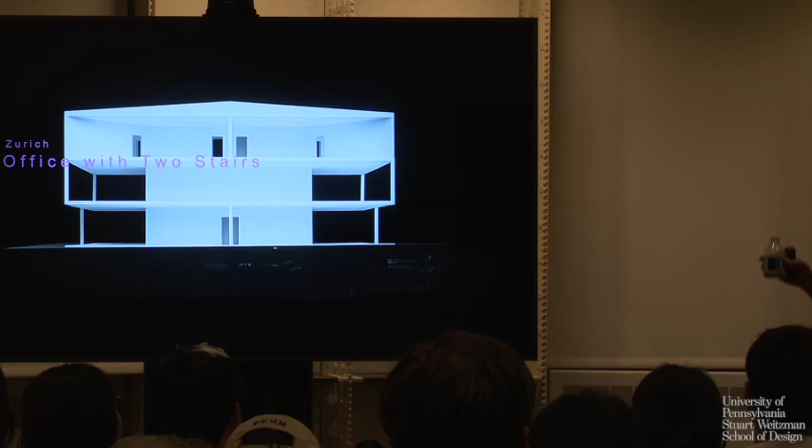So this led to projects like this, and this is a student work that I made in my last semester. We were asked to design an architecture office for ourselves and how we would imagine our lives. So that's already the final project, and I will explain it.

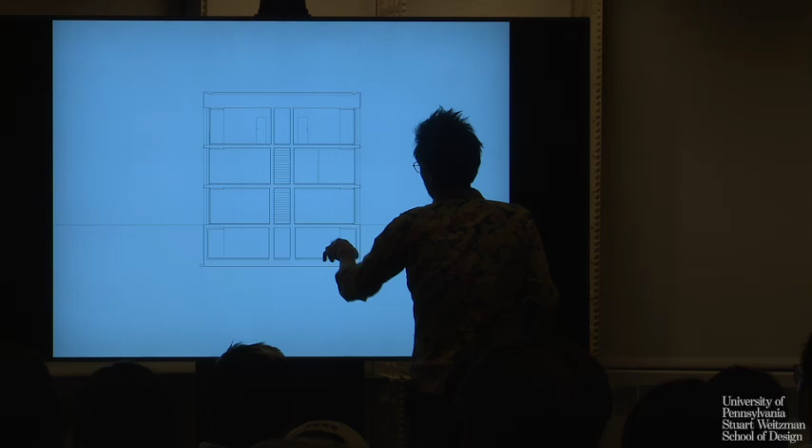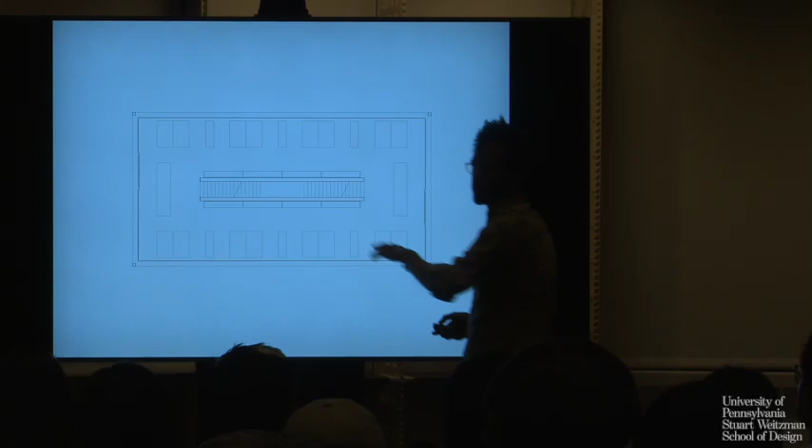It's in a garden somewhere in Zurich. It's a 3-story building above ground and one below ground, with a core in the center with some stairs. Now imagine you will be my people working in my office. You would come through this path, say hello to the secretary, walk around, and take up these stairs. You come in here, you walk up to the first floor, and you find your place, your table, in the first floor.

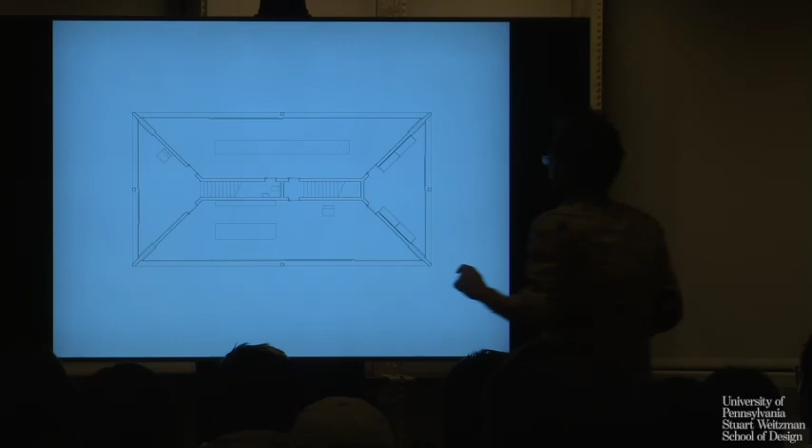Now, if I would come, I would also walk in, say hello, but I would take these stairs. And my stairs are blind to the floor where the workers are, so they don't see me and they don't see the condition I'm in. I just go through them to the top floor, and I'll arrive in this little foyer space, and enter into my small office all alone, with a little library and a little desk.

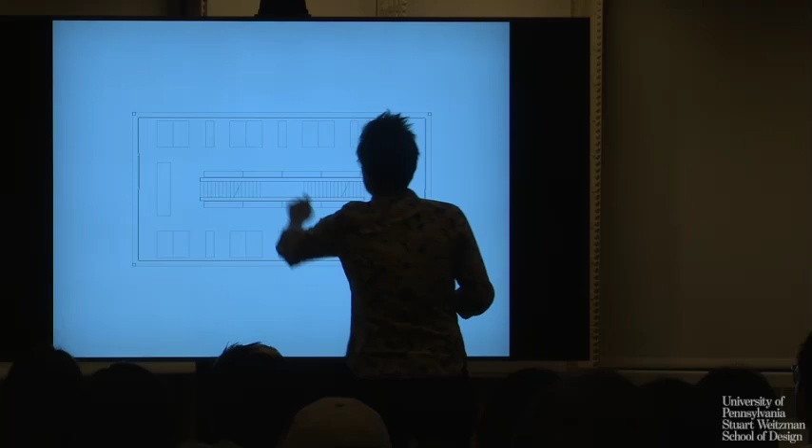And if you look at the structure of the building, it has a core holding the 2 stairs, and then it has 4 cantilevering walls. These walls hold a roof, and since the span is so long, it increases the structural height in the middle.

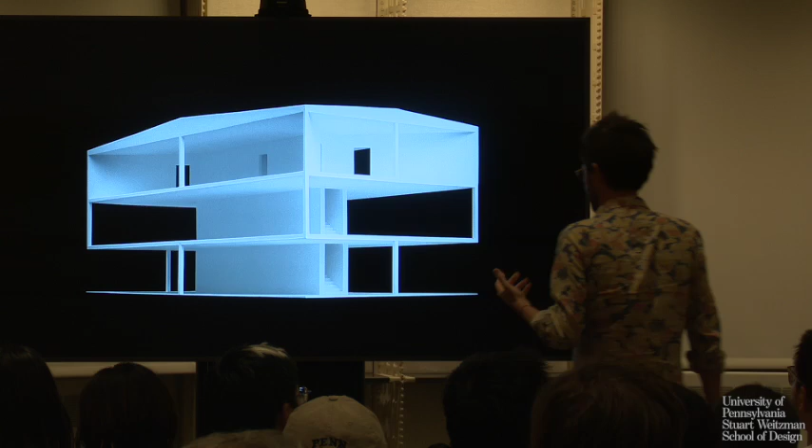And this plate is hung on the cantilevering walls, so it would have a tendency to bend through. In order to not bend through, it's pulled up. So this is actually not a pillar on compression, but on traction. And the same is with this plate — twice it's held on a traction cable, and only in the middle is it actually a pillar on compression. But so that you cannot see this, or feel it, or understand the system, this traction cable is formulated as a pillar on compression, a 20 by 20 centimeter pillar. So it's a first trial to mislead your reading of the building.

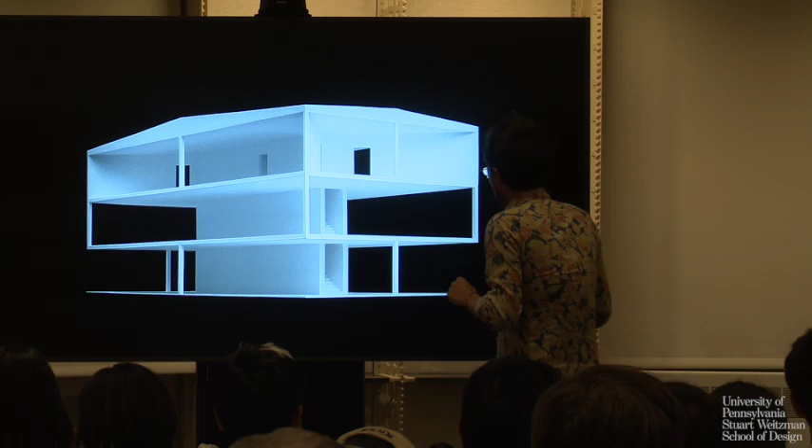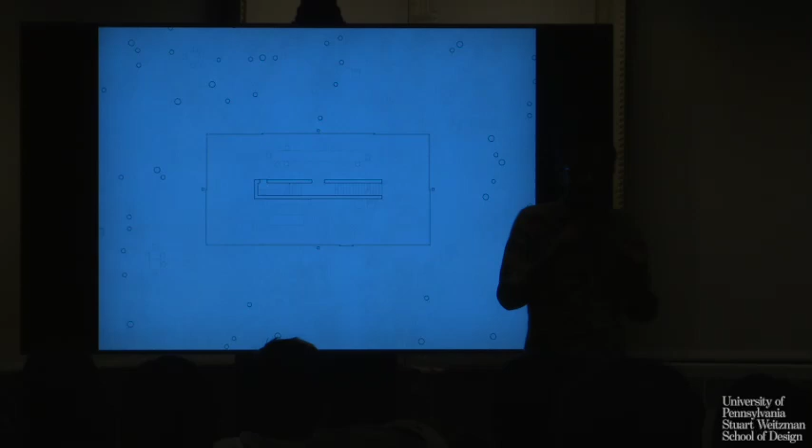The next thing is, spatially, I think we have an overlapping of the three principal building spaces in architecture. The first is when the pillars are in the middle, like the Noguchi lamp or the 50 by 50 building by Mies. The pillars are in the middle and not in the corners, and as a consequence the inner space is not defined, and the space can just flow through. While in the working space where I want people to work, they are contained.

And on the top floor, there is this space that has a strong back and a direction to one side, an opening.

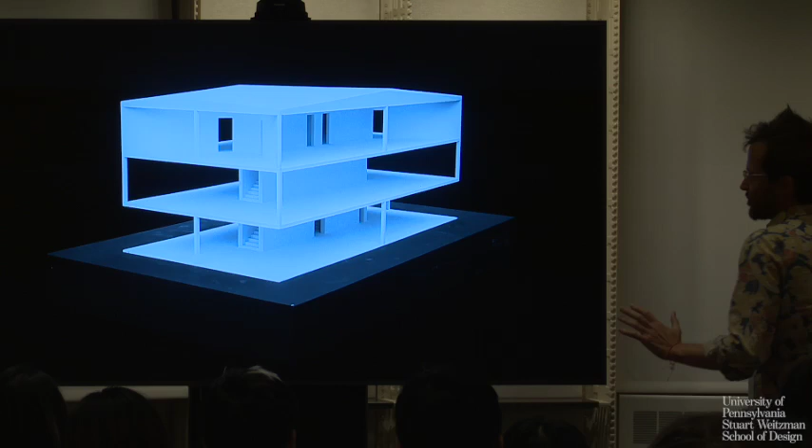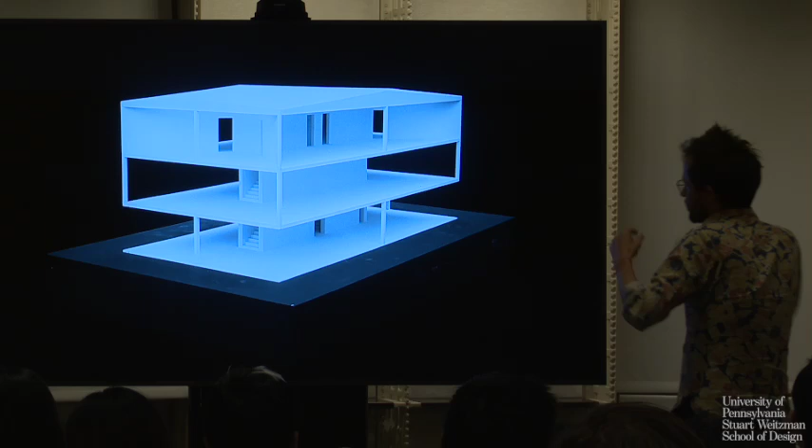So when it comes to the reading of this building, I think it's interesting because it overlaps several connotations or readings. One could read it as a kind of Greek temple because of the tripartition, because of the roof, which is actually structural. But it could also look like a Maison Domino with the plates and the pillars. But when you read it longer, you realize it cannot be, because the pillars don't go through. So I would argue that this...

building has a lot of memory, but none of the memory brings you to a conclusion. You're always lost. So it's constantly trying to make people interested to look at it, but at the same time, you don't get to an end.

Good, and the next project I would like to show you is the house in Balsthal. This is a little house in a valley in Switzerland, in the mountains. This place is a very beautiful place, but also a very boring place. So I imagined the house should be so good that you could stay two weeks in it without exiting.

Then I built it. And the proposal for what this building does is kind of a machine to perceive the exterior in three different ways. These three different ways are simply stapled on top of each other.

So the first space is when you enter here. This is a space that is completely glazed, very low, and I would say no back wall as a consequence, because it's all glazed. You never have a back wall. I would say this is just kind of a hole in the entire territory.

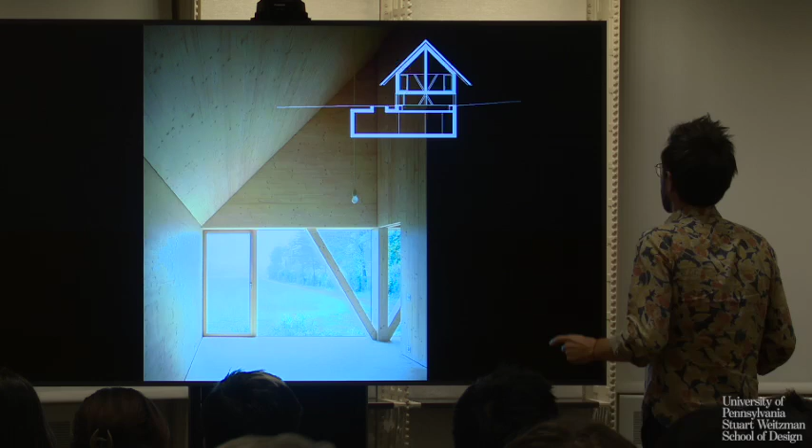This is the exit into the garden, and this is the kitchen. Now we're upstairs - the oppositional space, the high space. It's in the simplest way divided by four plus a staircase. It's the simplest way to produce an entry into these four rooms.

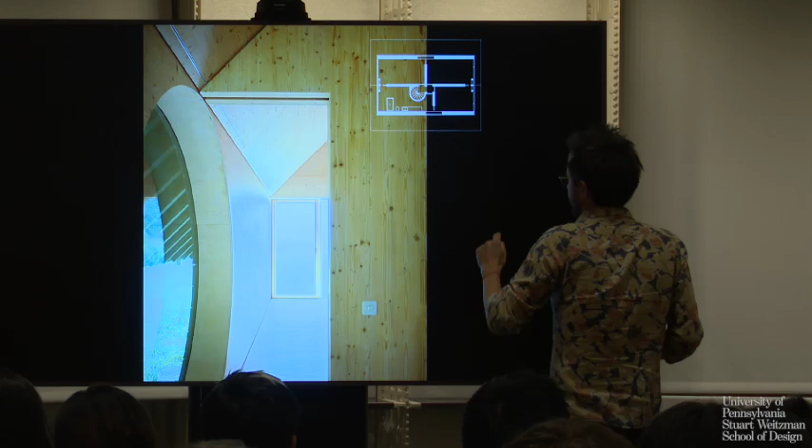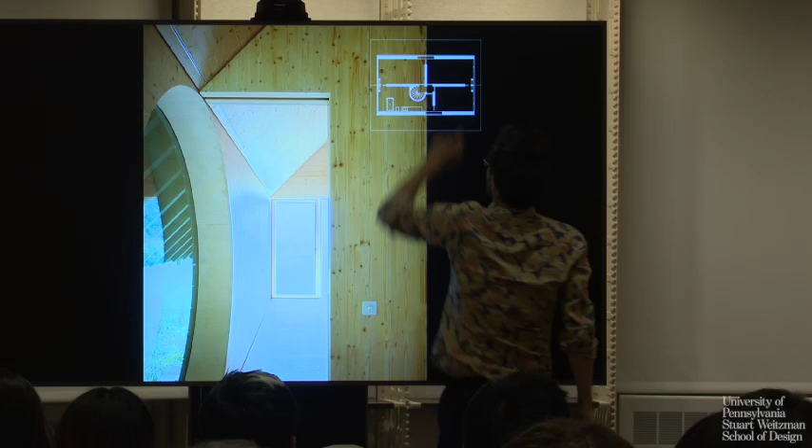And what I mean by this round window - that's quite important in this project. It started because when you imagine a building with a gable like this, it's very easy to open this side with glazing, but it's very difficult to open here, especially because in reality there are two pillars below, so it's really the worst place to punctuate it.

But in order to produce a balance between this direction and this direction, I proposed this huge circle that has such an emotional power that it's able to balance or compete with these two sides, so they become kind of equal.

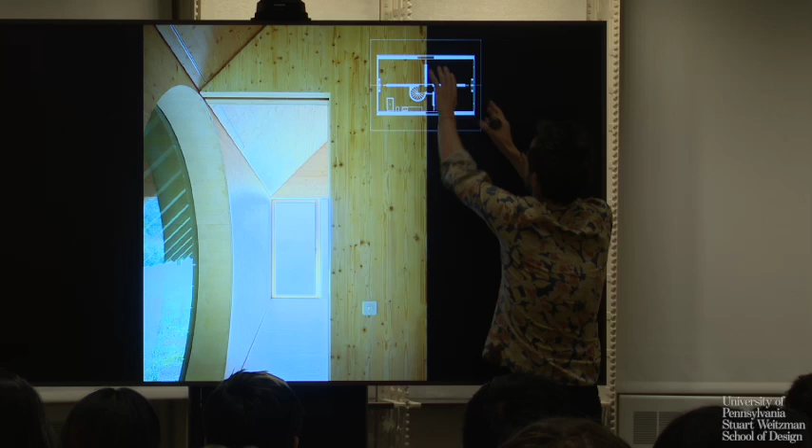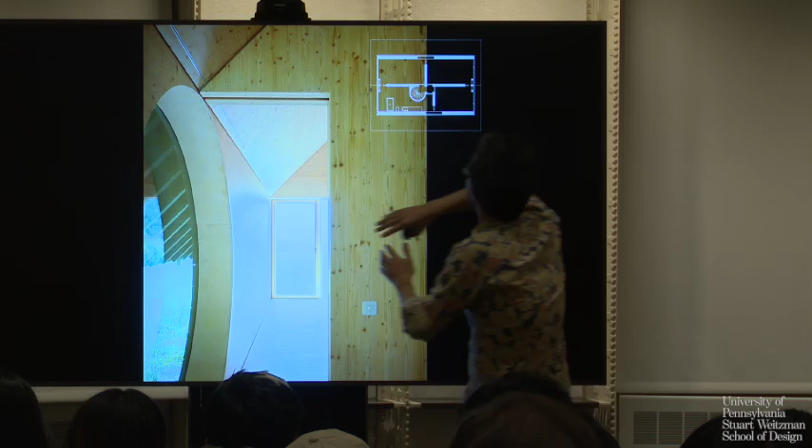What I realized after construction is that it's a very nice place to be here, and I think it's because you have 4 scales at the same time. One scale is the nails and the material stuff you see. The second is the scale of the person, because this circle is kind of the size of a person. The third scale is the huge inside space, and the fourth is the flat landscape, and this all happens at the same time.

So now we go from the top room to the basement, which is this one, and this space looks like this.

The next project we'd like to show is a house in Bonassola. It's in Italy, a very beautiful area at the lake, at the sea. When going through this land, I realized that mostly the old buildings are very beautiful and the new ones are very ugly. And I kind of asked myself why.

In a very simple way, I would say these new ones just don't get the patina in a nice way. The plaster is out of plastic. They just don't manage to get nicely old.

So I thought, let's do a building that from the beginning looks extremely old, like a ruin already, like it was already over. So I started with a section, before knowing the space, because the idea was how can I get all the little details away so that I don't see things that indicate time, like electric plugs or the frames of a window.

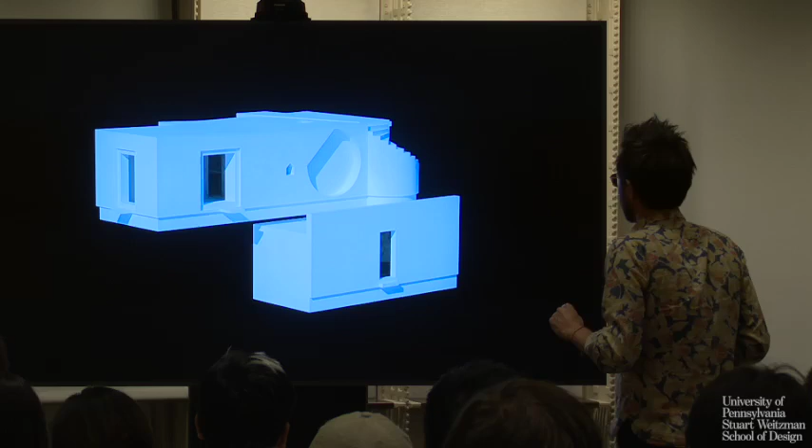It's a very beautiful view, and this is actually how this building looks. You arrive from this upper part, see down into the sea, go down into these steps, and enter from the steps into a little garden. And from this garden, you come into a main space and some additional rooms.

This main space is divided into two rooms. One room is a winter and summer room, which has no windows, and the other one is the in-between room, so spring and autumn. In the autumn room, we have a Zentralraum, like a central space with 4 openings, while the winter and summer space has no windows, but a little zenithal window.

I always like this idea to be in one space, for example here, and at the same time you're also in its opposite, and you kind of see both, but are in one. I like this double existing of things.

From here, this may be interesting. I needed some place to sleep. But the building would have been best without any room to sleep, because now it's completed, it's kind of a perfect rectangle. And I tried to find a strategy to add a room without you seeing it somehow.

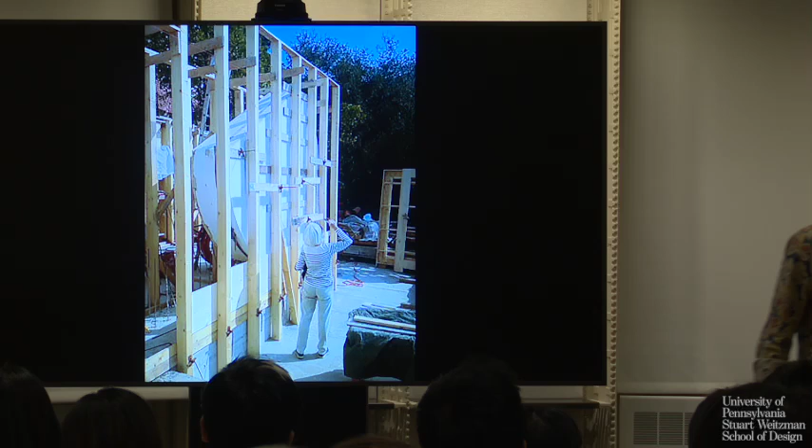I wanted to imagine, this is another aspect, it's on a slope. And as you can never see this building as an object, you never have a distance to see the full building. The building is always like 1 meter in front of you, because this is now a construction site, but here it will immediately go down. So you're always along this wall when you walk around it. And what I wanted is that this wall becomes very, almost like Baroque, but in a contemporary way.

So I tried to do the ugliest construction I can. We took this Roman way of pouring concrete, of making this slab. So there is no metallic binder to make it tight, and all these boards are not tight, so the concrete milk will always exit and it will be full of holes. And like that, I hoped that when I'm close to this building, it's full of man-made traces.

And you also see in construction, it indeed leaks out everywhere, and it also has this physical proximity of concrete and trees. Here are some first already pictures of how it now looks.

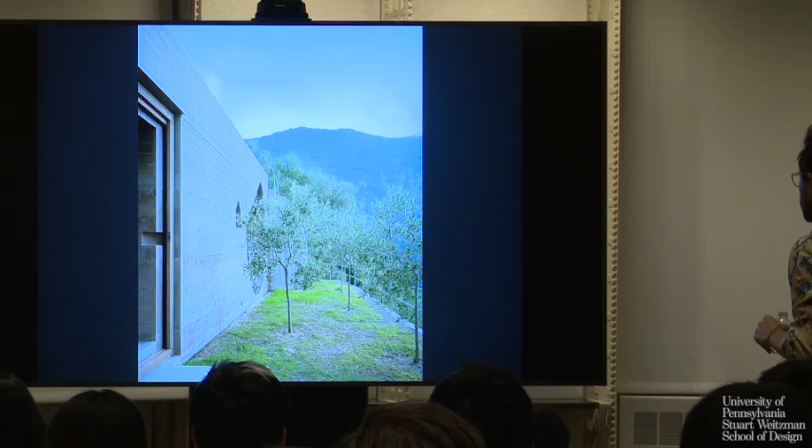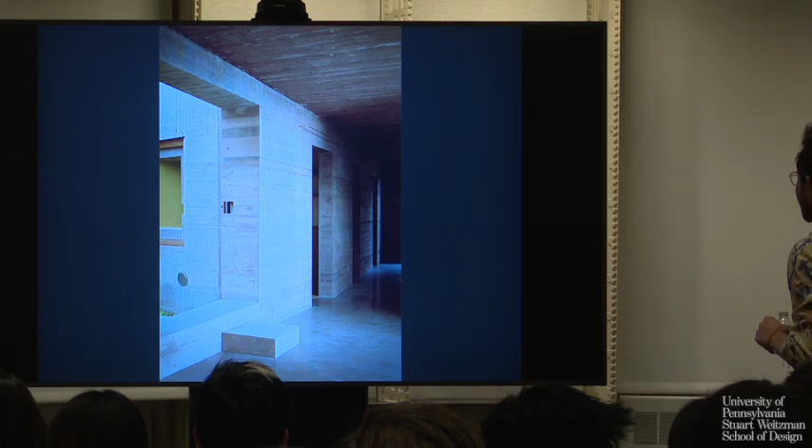Sorry, doesn't end. Yeah, don't talk about this. Okay.

No, I mean, maybe I do. When you are there, it's interesting. You have proximity, close stuff, walls and bricks, but you also have this universe and this huge sky and this huge sea. So you have these two complete different scales, the proximity and the wideness. And I always thought it needs something that responds to this wideness.

And the proposal now is that somehow this circle with this cut can, in an esoteric way, almost start to communicate with the sky and with the wideness. So it's this antenna or this simple thing that can connect with the sky or with the sea.

Good. And next project is House in Harris, House on an Island. This project is based basically on the condition of this area, and the condition is it has no trees, it only has water and rocks. So I tried to do a building that is able to confront the idea of water and the idea of rock.

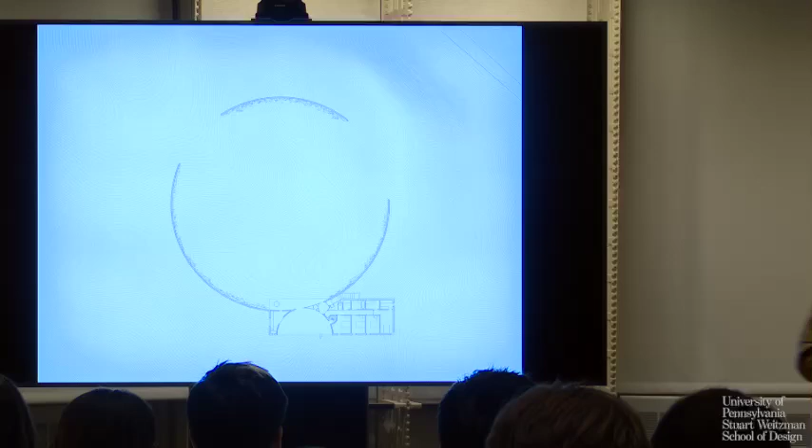And that's the conclusion, that's how the floor plan looks. We have here the space that should be able to confront the sea, and here, as a fragment of this whole, it's the space that activates the rocks.

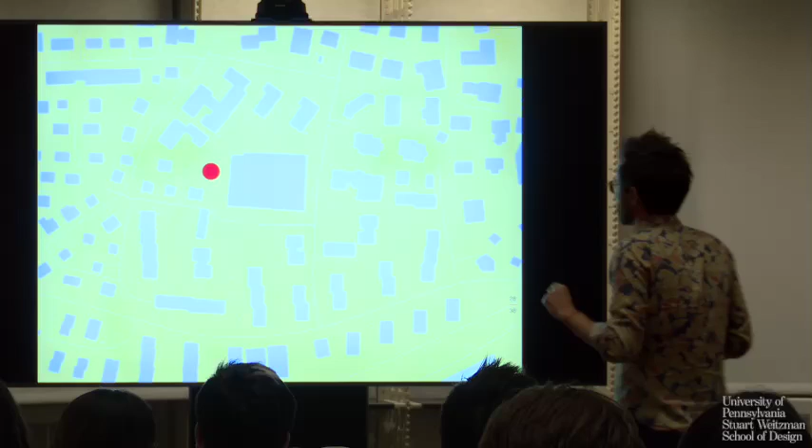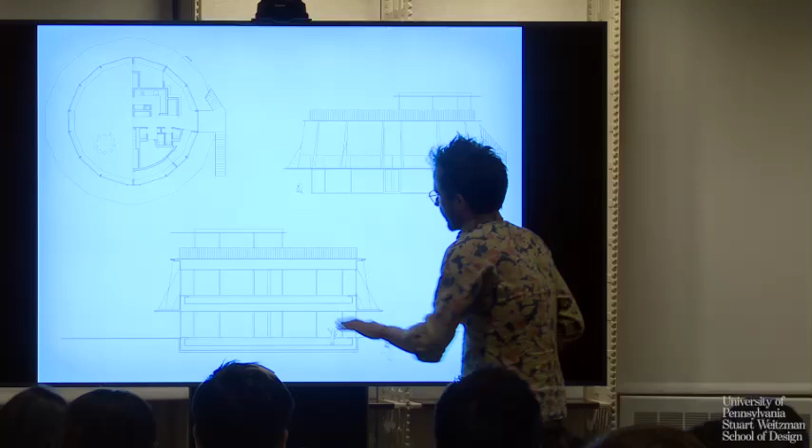And I'll not talk so much about this, that's how it looks. These are these school rooms.

Good. And then lately, or already some years ago, I thought that this picture of the donkey was kind of over. You know, it doesn't represent anymore my time. So I was asked, or I thought for a next publication, I make a new picture.

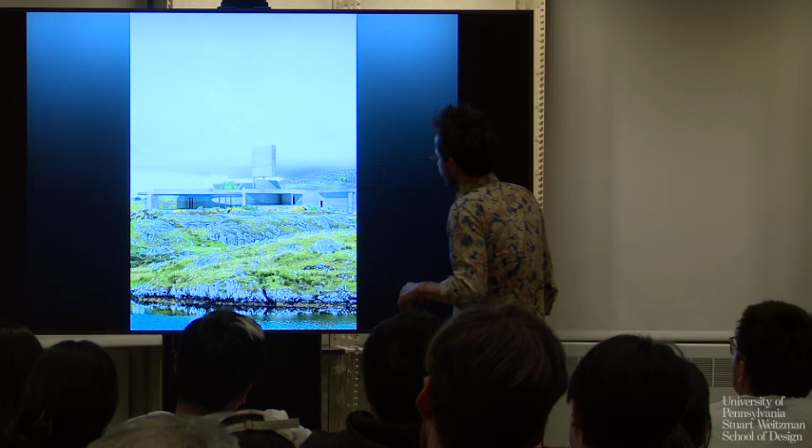Same landscape, but this time a very different project. There are no more clear rules, and architecture just becomes a kind of procedure to walk from different spaces to different spaces. Also in the model, there is no more gross or general idea — also in section, and also in the perception.

It's a building, the whole thing — one rectangular space, with one wall that divides it into 3 places: eating, bedroom, and bathroom. And in section, it goes slightly up to the forest, and it has this roof towards the street.

So actually no more real rules for things. Similar for this house for a doctor in Switzerland, at the Lake Gruyère. He has a family with 4 kids, and he's a doctor who operates, and at night he goes home and fixes cars to relax.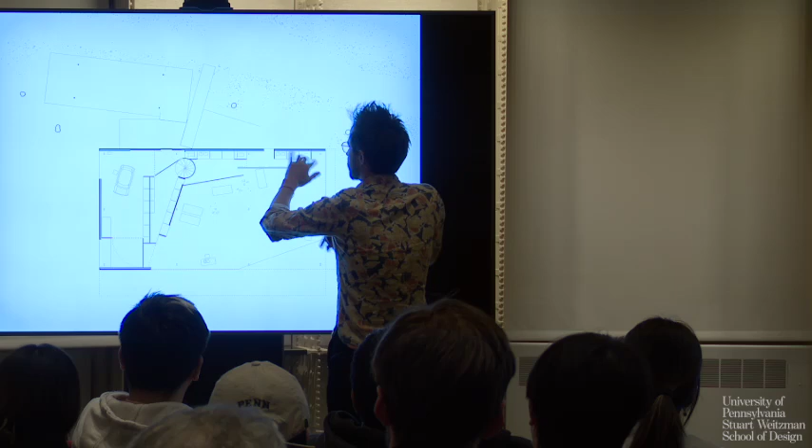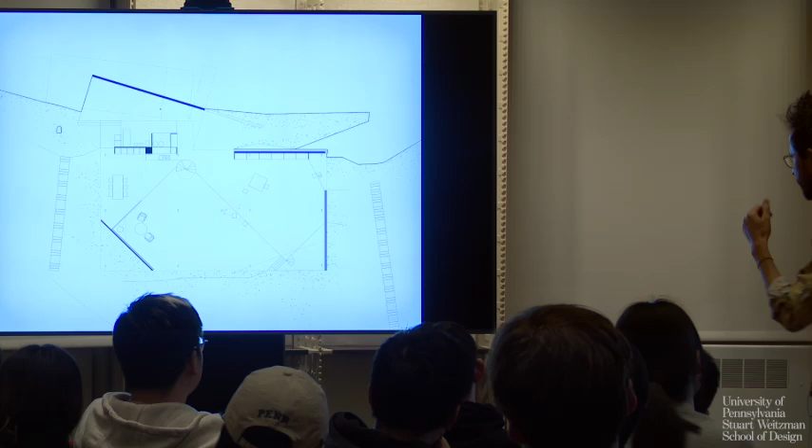That is the floor plan of his building. So you enter the building, and there is a wall where you can either go straight to his car repair place, or a wardrobe, or to where the 4 children somehow live in this unordered but huge space. There's some kind of toilet condition, stairs to go down, and then also down — it has no more clear structuring order, but only, I would say, a kind of temperature or a kind of taste of space.

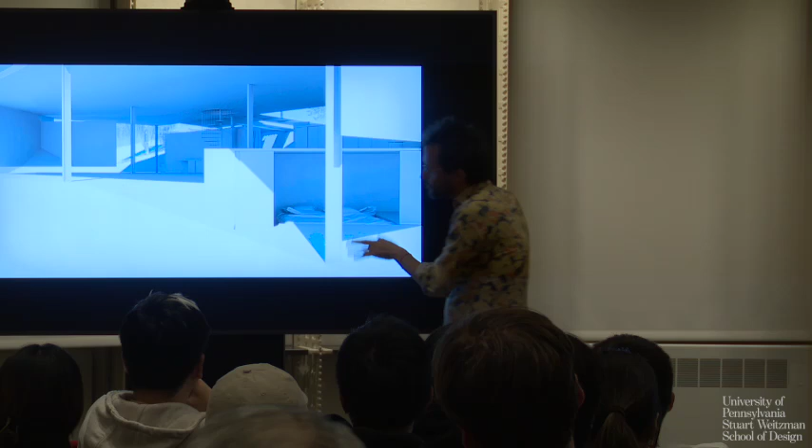That's how you enter the building. These are the kind of spaces in here. I always liked that there was a very small way to go to the bedroom that is kind of hidden from it all.

Now another topic that came in parallel — there was a kind of housing we always did a bit, and this was a study project for the national train company in Switzerland and for steel people. It was during COVID, about how you can combine living and working, and how you can apply this in housing.

I find it also very beautiful in these pictures that exist of Louise Bourgeois' apartment. You can always kind of double read them. It's somehow her living room, but it's also somehow an office or something. It's not really clear what it is, or this is her kitchen and workspace that somehow expands in a funny way, or that's her bed.

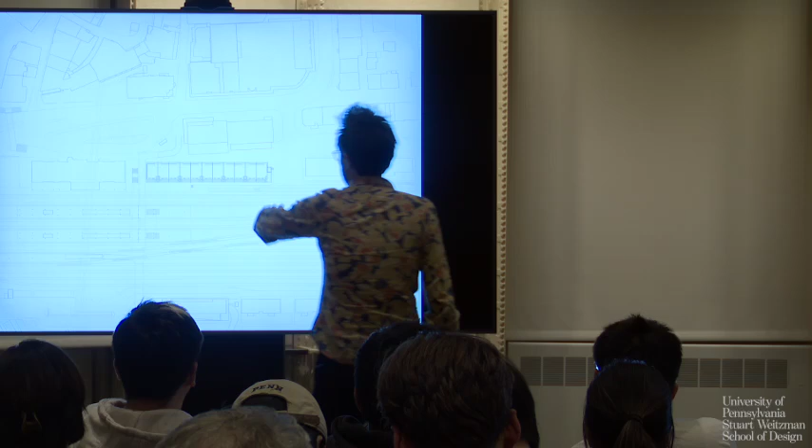So this is this housing based on this idea along the train track in Switzerland. And they base typologically on two ideas. There are spaces that are too small but extremely specific, like in a car, everything is very precise, and even though it's small, everything has its space. And then there are other spaces that are kind of too big, but they are programmatically undefined.

There's another principal idea that in Switzerland usually the bathrooms are in the cores and the sleeping rooms are at the facade. So I thought it would actually make more sense to invert this, because you go and sleep in a very protected place, like almost in a cave, so in the center, but you go and wash yourself at the nature where it's clean and the air goes through. So bathroom goes to periphery and sleeping goes to the central, to the core.

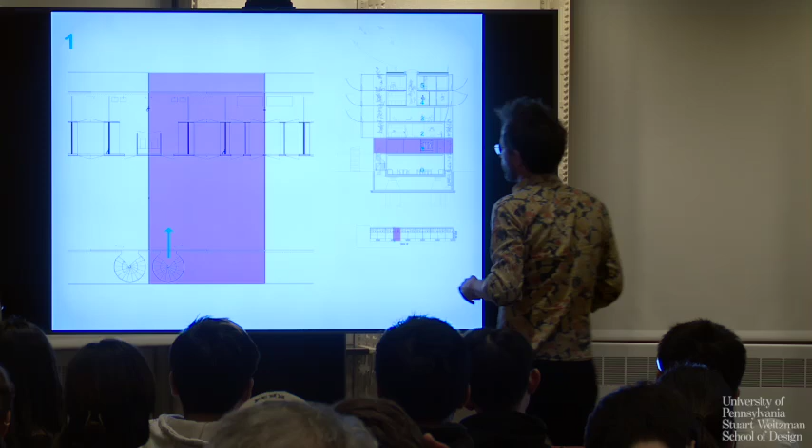This produces then some typologies. So this is kind of this undefined, too big ground floor space. And then you would go up and it would have 4 bedrooms here, very small, and the bathing area in the back. And you could open this bedroom walls, so it becomes part of the space and kids can kind of run around, or you just open the doors like this.

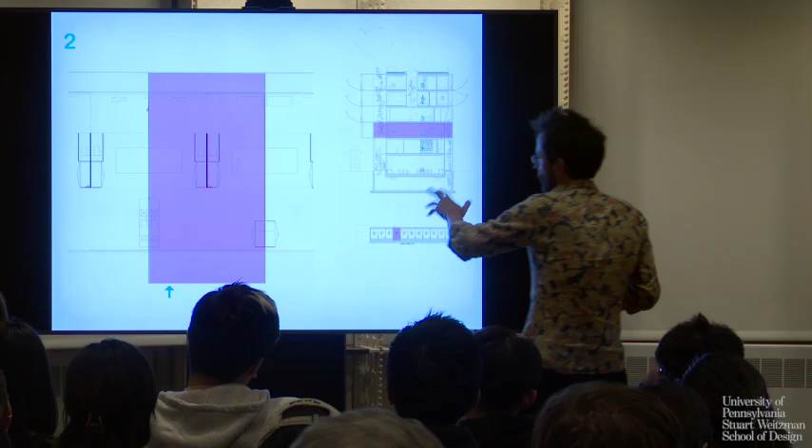I will not go into it, but there was also an elderly home, new typologies for an elderly home, and also some typologies for student apartments that are extremely cheap by simply making the bedroom very, very small, which I will also not enter, and then a structural system to have a community level on one floor.

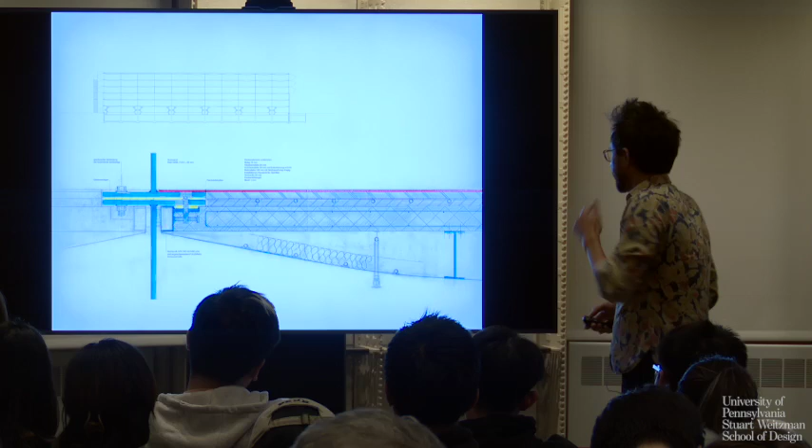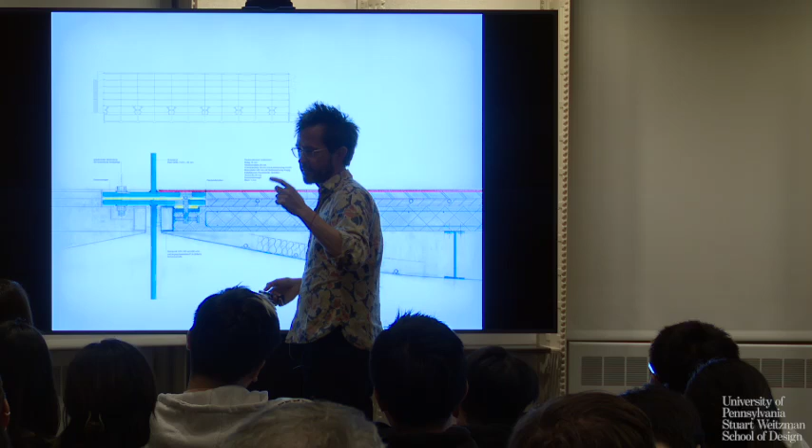And I wanted to make this look like paper. So it's built out of steel. This is a full steel wall. And by the way, this really works according to structure and phonetic and fire problems. I mean, it's really buildable. It's a steel of 2 centimeters. Actually, 1.4 would be enough, but we made it 2. And very thin slabs, which kind of don't work in metal because of fire reasons, but that was the slimmest that we managed.

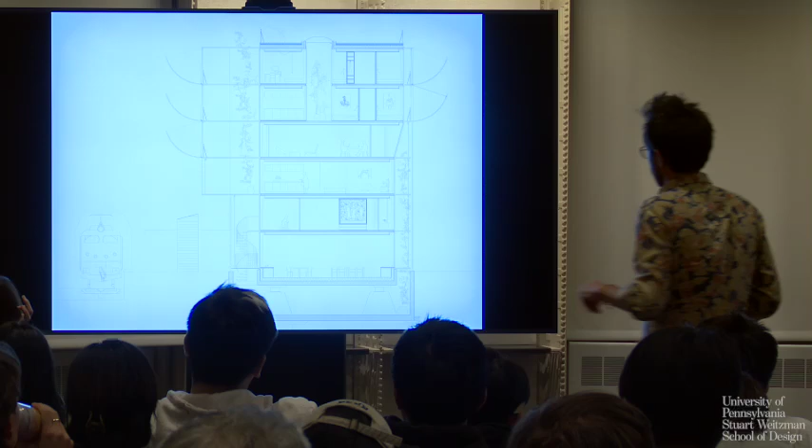And that's how it looks in section. And it's a section into the other direction. And this is a facade. So it looks like kind of a paper model that is built in big.

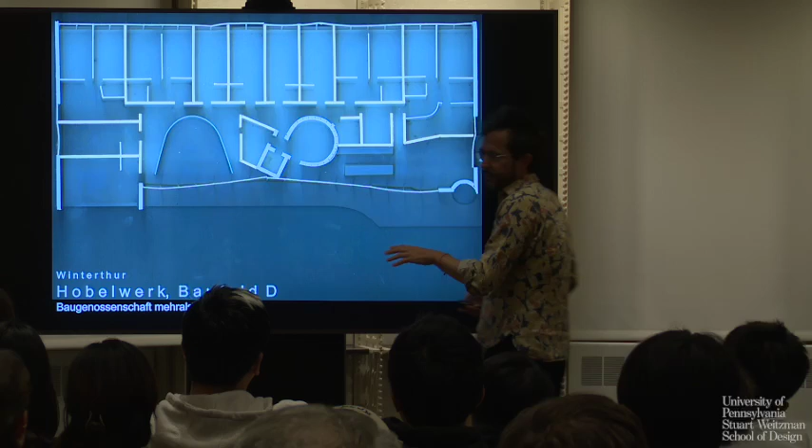Then maybe the last project is the one that you mentioned. This is another housing project in Switzerland, Hobelwerk, for a Genossenschaft, like a cooperative or building cooperative or something. The idea of this is to have a lot of rooms, and they share the communal spaces. So it's a 16-room apartment. It's here on this old industrial place.

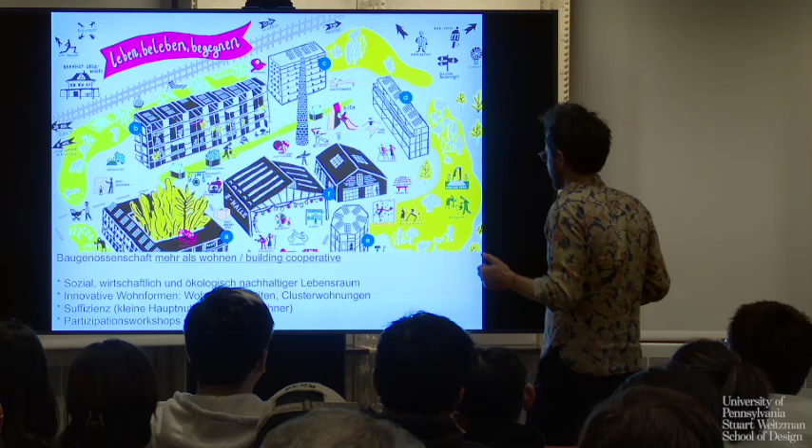Maybe just to show you what these people wanted, which I find interesting. They wanted to be very cheap and very ecological, and for working and living to be together, then this huge apartment, and then sufficience, so trying to minimize the square meters per person, because actually in Switzerland this grew and grew over the years, and no wonder apartments get more expensive and we use more and more space, because within the last 40 years the space per person doubled. So we try to shrink it.

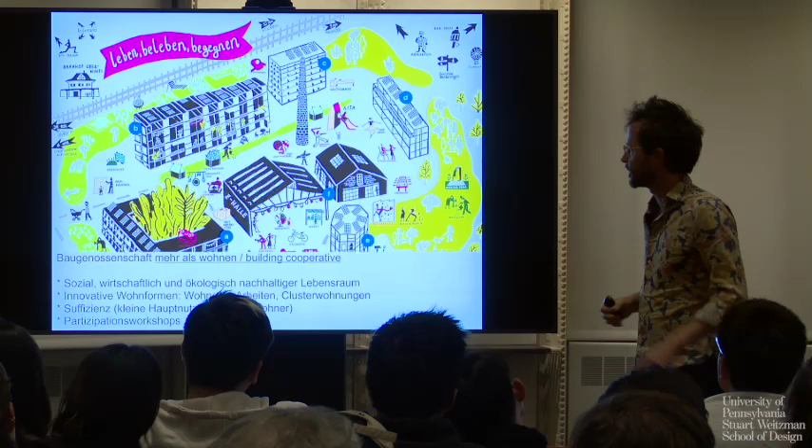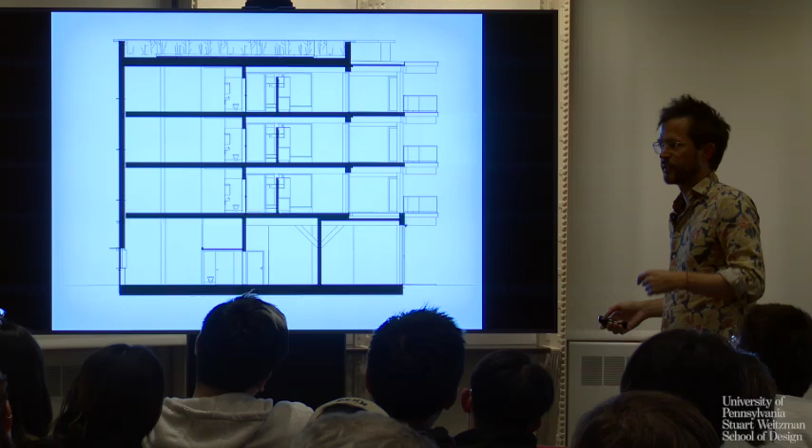And then, of course, there is this workshop where the future inhabitants already participated in the design. So that's a section. Maybe I didn't explain this here. Yes, it's 4 floors. And again, in Switzerland, it's actually a very big topic to reduce the production of CO2, so we try to do buildings without concrete, basically. And it goes so far that we also try to stop doing any undergrounds, so it's just a plate and then a timber construction that I will explain a bit more.

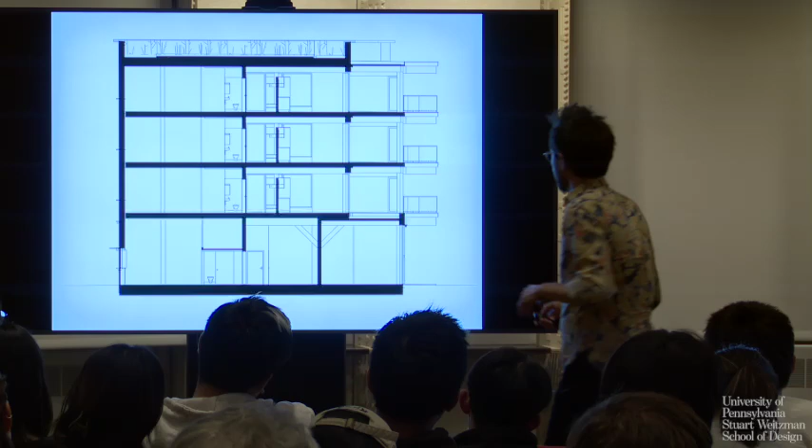Also on typologies, I find it interesting. It has some new research. This is the ground floor.

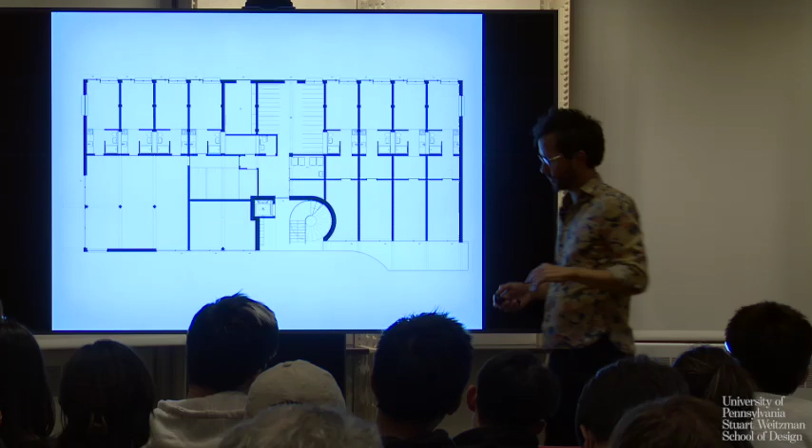So for example, these 4 individual units share together one large space. For example, 4 architects have their little apartments, and together they have one office space. Or a bit more traditional, somebody's living here and having an atelier to the front. In the upper part, there are individual rooms, some toilets, and then all this becomes kind of a landscape of living rooms. Because they put their living rooms all together, the amount of square meters they use shrinks.

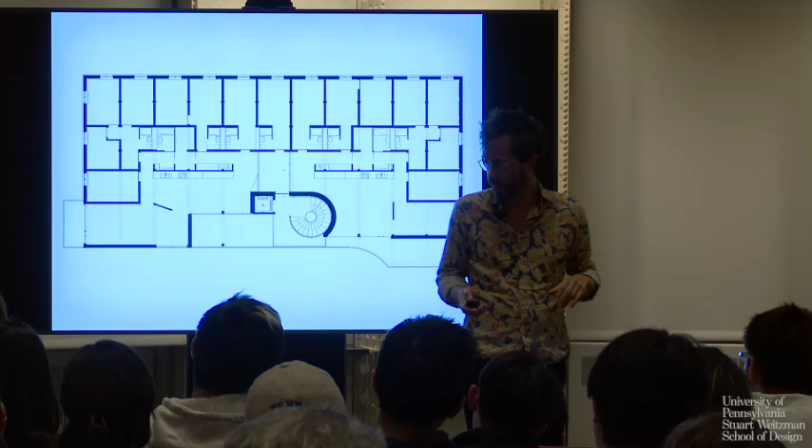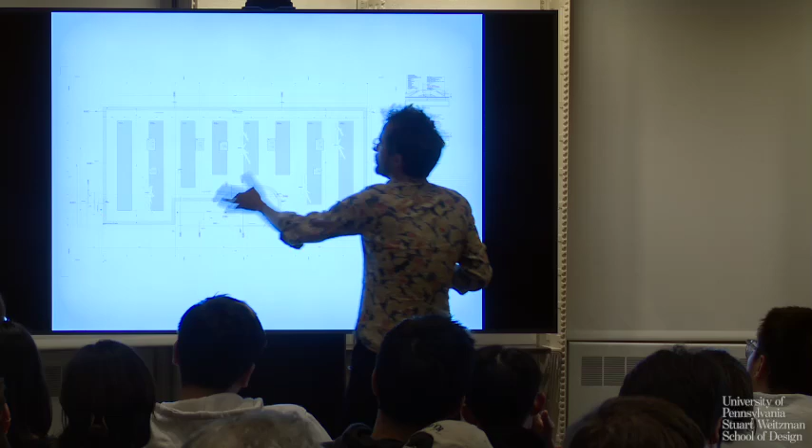And on the roofs, we propose this place for wild bees, because the diversity of wild bees, the bees that actually pollinate the flowers, decreases heavily. So this is exclusively a roof especially for wild bees.

And in this whole project, we try to reduce all the asphalt, so the water can always go straight into the ground to re-evaporate in summer. And of course, basically fill it with plants as much as possible to produce shadows.

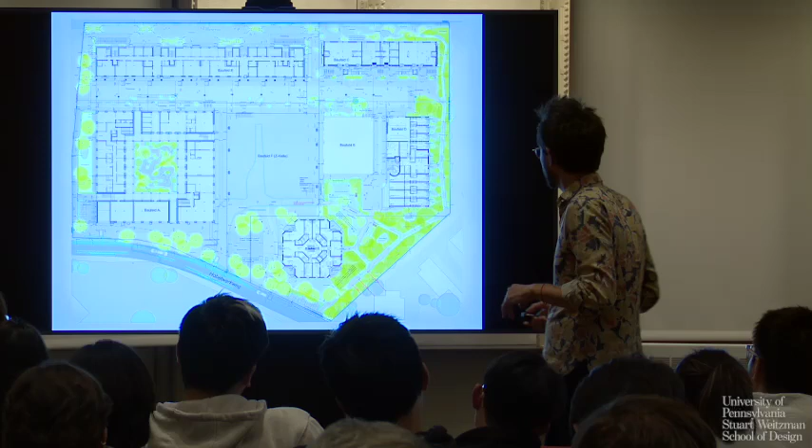In terms of producing it, when we really started to build it, it was interesting. On one hand, we made this wooden construction that is also optimized on CO2, which was done when we asked the builders for their prices. We also asked them how much CO2 they were going to produce with the construction, how long their paths would be to deliver, where their wood is coming from, and so on. And it was seriously used as one reason to choose them.

The other thing was to reuse the building elements, and 'ohne Sonderstatus' means it was not allowed to be more expensive, because it's quite easy to reuse, but it's very difficult to actually keep the low costs.

And then some other new things are that the air is controlled, but it's not done on a time loop or on temperature, but on the amount of CO2 in the air. So it's the CO2 in the air that regulates if the machine runs, not the temperature.

And the fourth interesting thing, we have energy peaks when we need a lot of energy, just when you run a building. And we tried to find ways to cut these peaks, and to flatten these peaks, but I will not enter into it too much now.

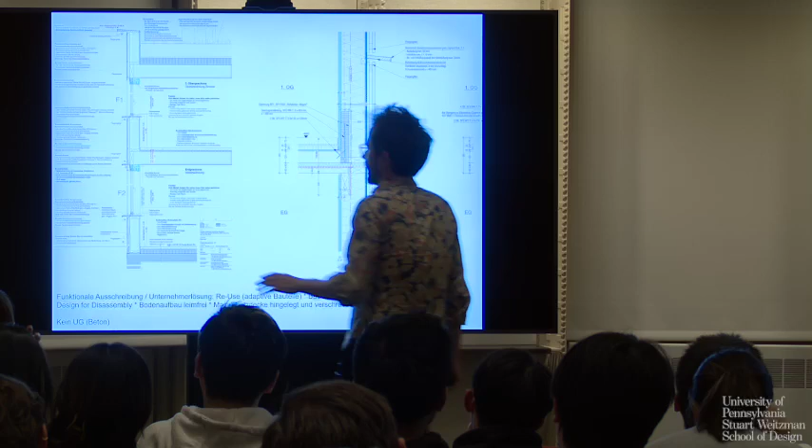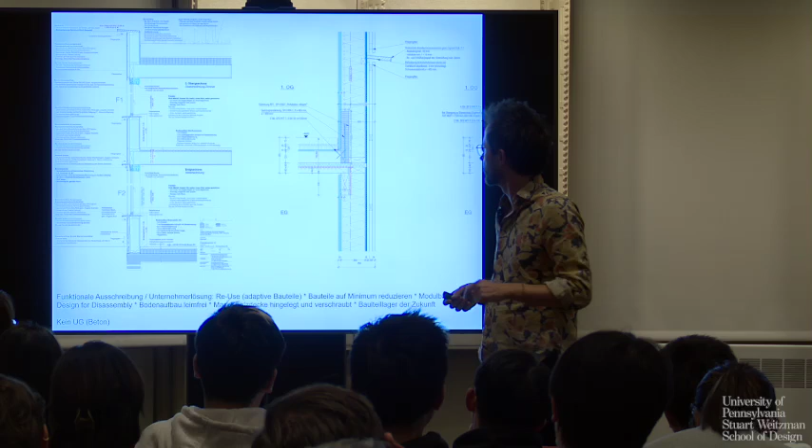Another thing that I thought was interesting is when we asked the wood construction company to bid prices, we did not define the materials. We only defined the final spaces. So it's kind of a functional subscription or something. So it was the wooden construction guy that would then propose how to build it.

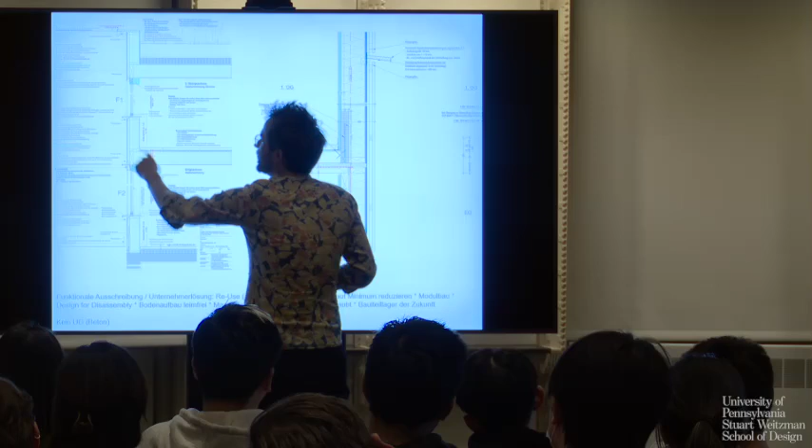And also, since it was done with reused materials, we told them, look, we don't know yet how big the windows are, or how big the doors are. So there were always these green areas which were unclear. This is, for example, how we then had a look at which client got the job based on this CO2 approach.

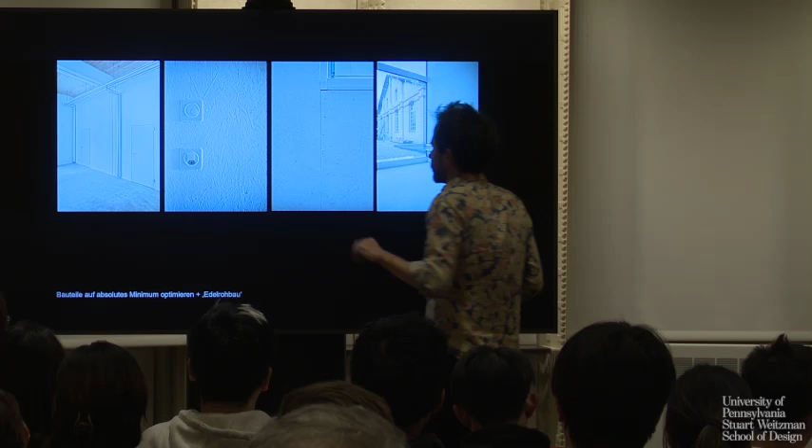Also, we tried to eliminate every surface that is not really needed. So it's kind of an Edelrohbau, like a nice primary construction. And as a consequence, you see a lot of unfinished materials, at least for Swiss standards.

Also very interesting, would almost be a lecture, is how do you organize the client, the architect, and the producer by reusing things? Because imagine we reuse an old window, and the problem is nobody can guarantee that this window works. And this happens with all the elements. Contracts are usually based on the idea that you deliver something and guarantee the quality, but it has a specific price. So what do you do if you cannot guarantee the quality anymore?

The whole system of contracts has to actually be reinvented. This was kind of at the beginning when we started. The major work was to find a new contract system between client and architect to make this work. I will not enter into it now, but I think that's probably the biggest problem with building with reused elements, because nobody takes warranties.

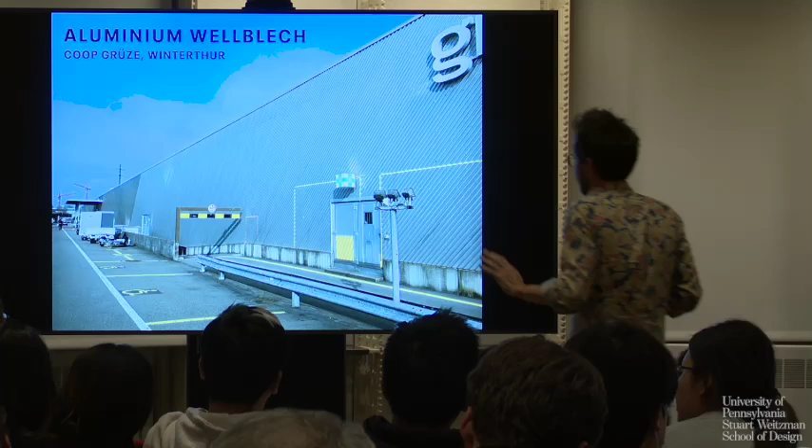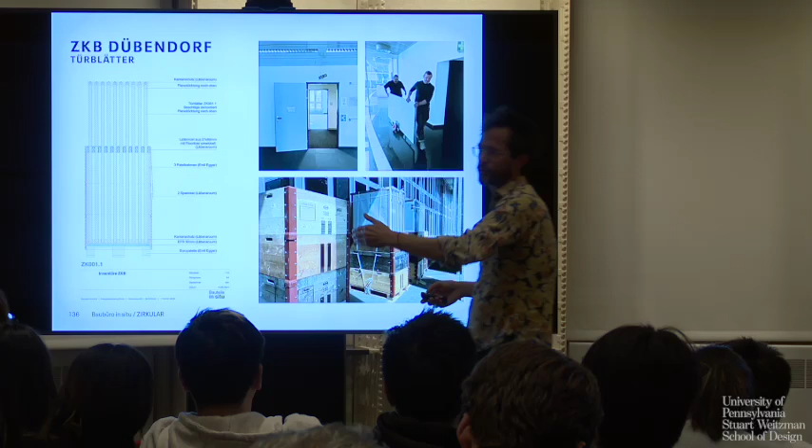Also very simple - that's actually the easiest element, this metallic facade is very easy to reuse. We thought old doors would be easy because they are always the same. We found out actually we had like 200 of those doors from an old bank that we reused, but then realized each door had a different size. We measured 2 or 3, but realized it's not at all the same.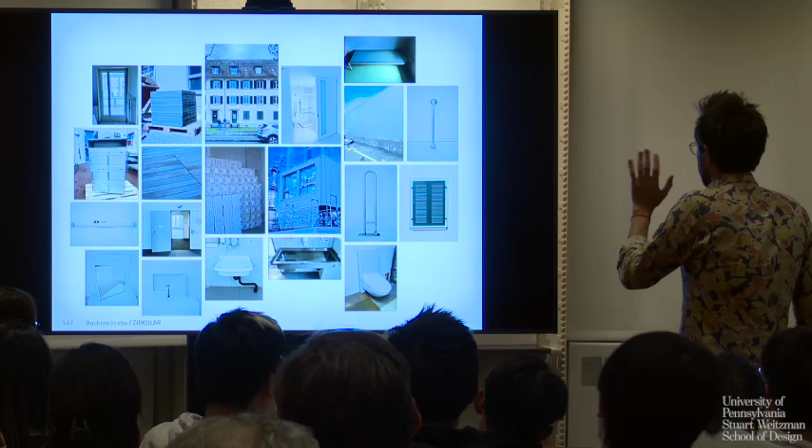Or this plate we used in the garden - but interesting, they're too slippery, of course you fall, so they're turned upside down. We took actually the other side, where they lost all elegance. These are some of the elements that you see that we reused.

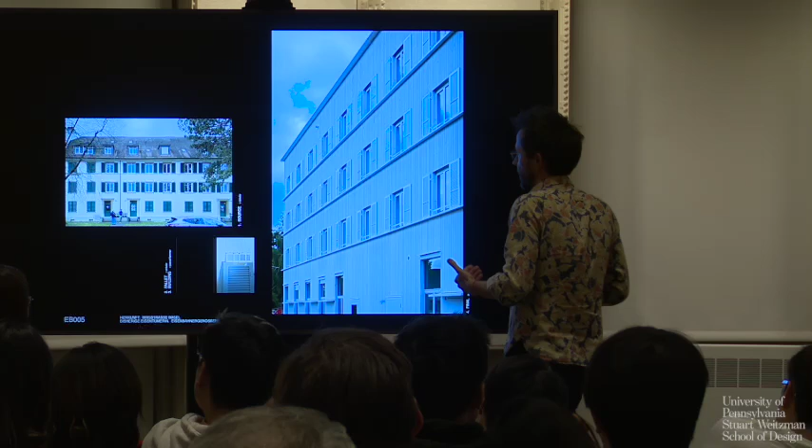That's already how it looks. What we did was, in order to produce a certain harmony, we proposed to paint everything in white. Whatever we get, we take everything we can, but we paint it in white.

Here you see the old window and then the rebuilt window. I find it quite interesting that 80% of the windows are reused and 20% are new. It's kind of beautiful when new windows and old collide just next to each other.

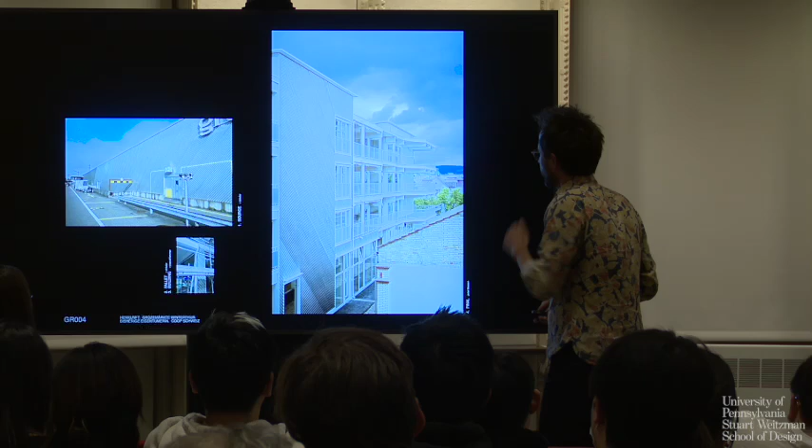Or here also, this kind of old 90s door is suddenly refound here. Or of course the metal, very easy to use. Boards for the ground.

That's this window, this mock-up window, the doors. And this is, I find also an interesting aspect - this gutter here to not fall down. It's actually from a bed from the prison of Zurich. It's this thing. So suddenly buildings have a very funny history or memory, actually.

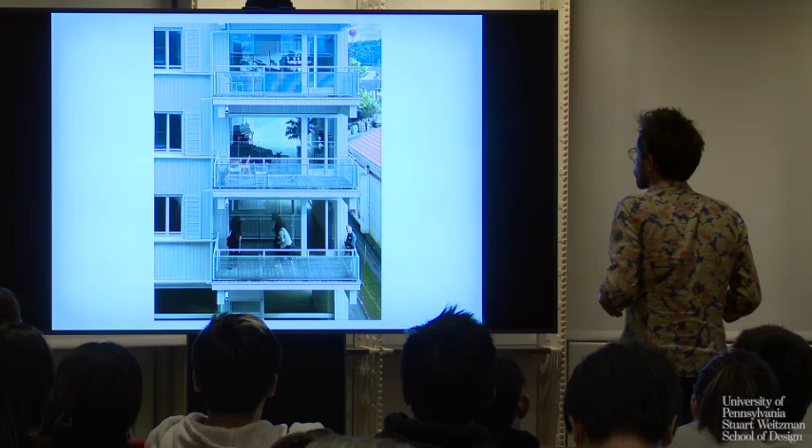That's how this prison balcony looks. These are some of the reused elements and where they're from.

It's at the moment in Switzerland the building with the lowest CO2 in production that was ever built. And also in running, it's basically zero because there is no burning. And of course it's quite clear why it's so little - it's because we have very little concrete. We have this timber, and on top, which is kind of new, these reused elements. And this combination makes it this low usage.

This is how it looks. And this is kind of interesting because in the end, it looks like a very normal apartment. It's almost lost, this reuse idea.

And also what I find, or it was one of the learnings, is all elements that are reused have a very high value. They're usually very good elements because since they were good, we could reuse them. And all the new bought stuff is very cheap stuff. So actually, when you go in this building, the old stuff you feel the quality, and the new is just trash, which I never thought of in the beginning.

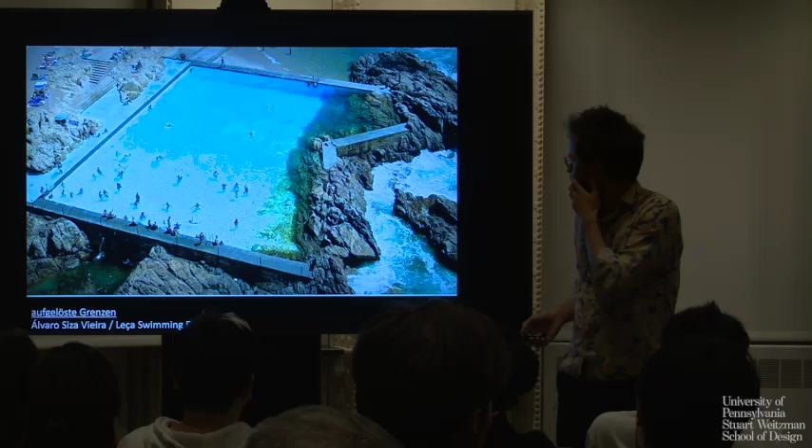And I think it goes together with ideas like this swimming pool where the borders are blurred, or also in a certain way this Sao Paulo train station where stuff only has a center, but it expands to infinite. It has no more clear edge, but it has a center.

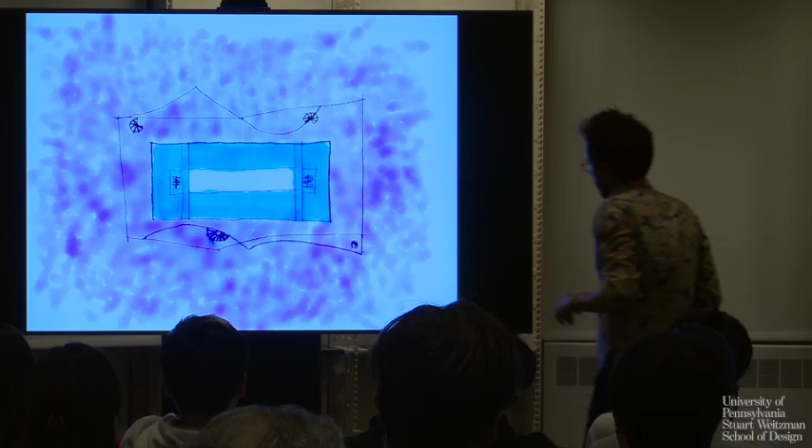And as a consequence, this is the sketch of this university. So it's just this landscape that goes in and continues in this building. It has kind of a core, and it's also actually an inverted university. So in the blue is the rooms where the students have, or where there are the confined rooms. And in the outside, it's all the walking areas and the meeting areas and the cafes and the restaurants and the study places. So it's actually the opposite of this.

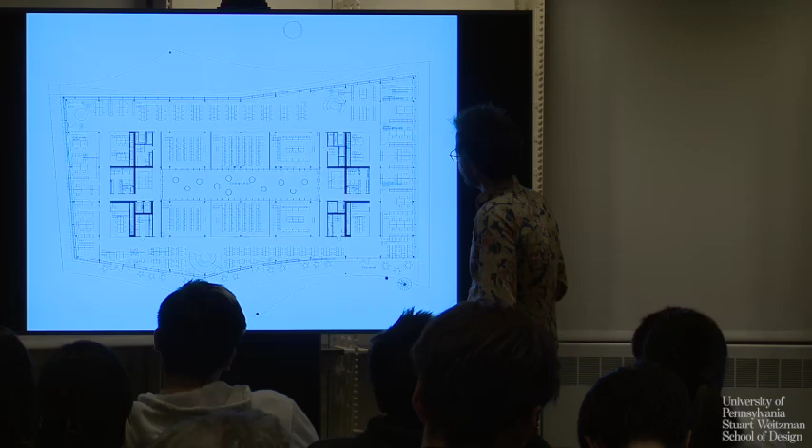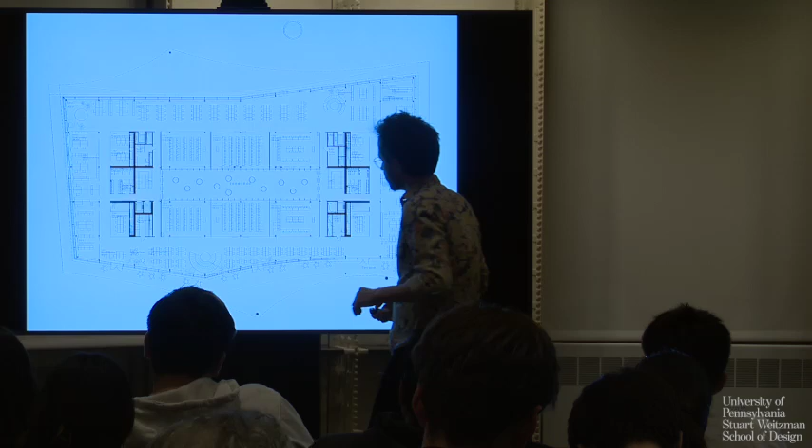Now that's how it looks. Also timber, and this - I think that was it. That was it. Thank you.

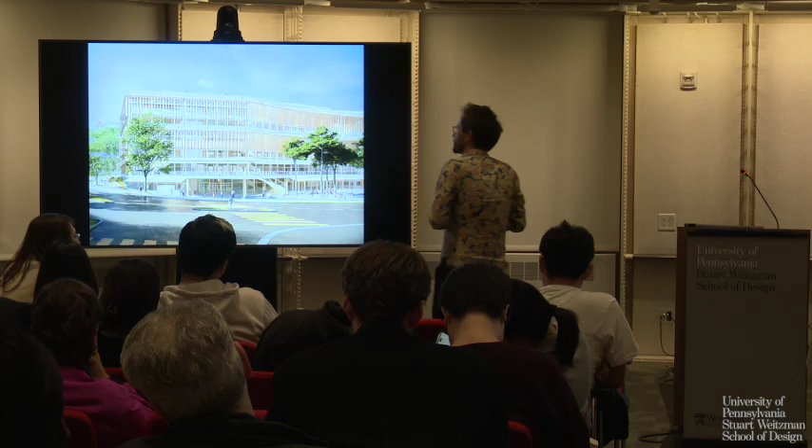That's one level. The other level is why I mentioned the two pictures, with the donkey and then later with this figure. I think there's quite a fundamental change from, in a certain way, an outside perspective on architecture in the first part—what it should do, in a kind of quite abstract, distant way, this quite well-designed office, but also very distant. The main thing that changed in the second part is that I'm much more the center. There's no more dogma or something—it's just more about trying to feel or understand what could be interesting in a building.

And of course I also had to sadly realize that it's difficult to tell the client to obey you—to say you need to do a square, otherwise it doesn't work. I mean, to have outside principles like that. So that's also a principle understanding, that probably the only way to make what I found interesting architecture was to really understand the client and the brief and the condition, and to really understand where I find joy and how I combine this.

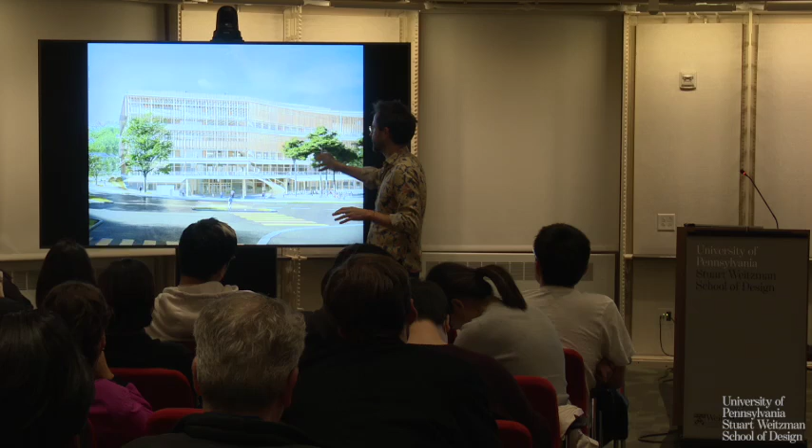And I think that makes all projects very different. I have to strongly adapt to the client's needs and still find an open door, one aspect that I'm interested in. Probably that makes—and I also see it—the work starts to lose a bit, in my understanding, the rigidity or the identity, because I have to adapt to these situations.

And then, this other aspect—honestly, quite often stuff starts without me understanding what I do. For example, with the naked women, this was the first project that had no very clear strategy. The buildings before all had some kind of systematic way to explain and develop them. This was the first building that did not have this story.

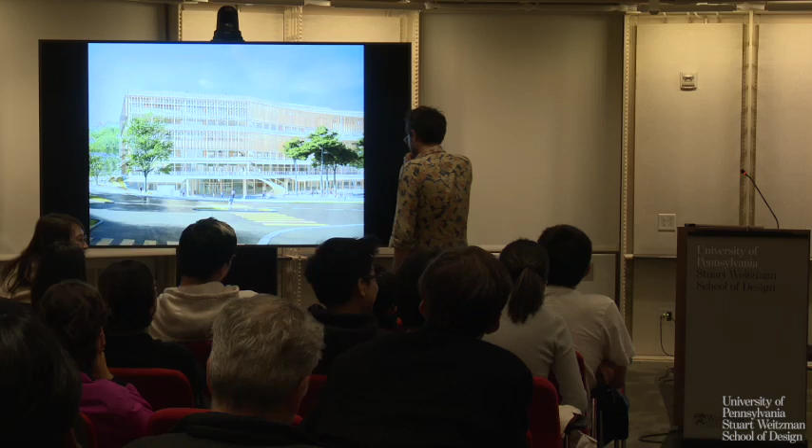I remember I was in my office and had to go give a lecture, and I thought: these people will not like my project because I cannot explain it. I thought they're going to be bored—how could I make sure I don't fall asleep? And then this idea of overlapping, maybe naked women—I thought maybe this will keep them awake.

And I indeed started to do plans and put naked women, and I put like 50 very different kinds of painters, motifs. For a funny way, this is a painter from early 19th century from Switzerland, which I find actually not very good. It's Vallotton. But I cannot say why, but I think together with these plans, I find it works very well.

And later I found out one way to kind of keep curiosity, myself but also to the outside, is exactly this strategy that you describe: you make one thing going, but you don't describe it, you do something else, and this thing is constantly blinking. It's making this urge, and I think we also try to do it in the studio with our works.

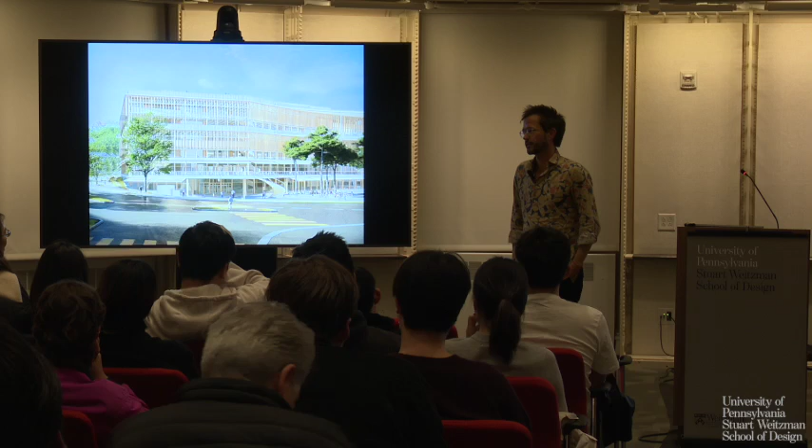It's actually very manipulative. It's trying to imagine - it's a bit like a studio director in a movie. We think a lot, or I try to think a lot, about how will the visitors perceive the building, a lecture, or a presentation. And of course, I think this double motif is a very good way to capture presence, because they want to get it, but you slightly go around it. So yes, it's a strategy I'm aware of, and I find it good.

And also I have to say, sometimes stuff is so good you don't need stories. I find, for example, the donkey a very strong picture, and I can explain it the way it happens - it doesn't need a story. Other stuff sometimes needs a bit of a story, so it's adapted according to the project.

Does that answer a bit? That was great. Okay. There's another one. Thank you, Pascal.

That was excellent. In response a little bit to the first question, I'll put on the table that surrealists are French and the Dadaists are German. And I'm between, yeah, somewhere between those two - maybe that might answer the first question.

But when you were discussing placing things in tension, the very last moment when you were talking about having the brief and then potentially subverting the brief or re-understanding the brief, I thought it was really compelling when you showed the Winterthur project and described all of the material opportunities for decarbonizing. I was really taken, and I hope some of the students heard it clearly, when you described that the selection of the contractors was also based on those that could decarbonize their own actions. And then the mapping you made, which you said was very complicated but I'm sure filled with a lot of information about how you changed your decision making based on this question of decarbonization, so we're self-reflecting on ourselves.

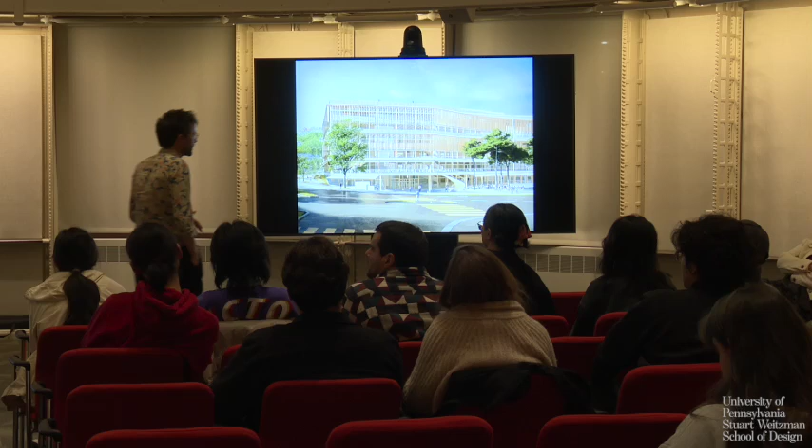And then in the later part, as you say, I completely lost this control. But also quite often just because of economical reasons—there was no money for it, or the client decided himself and I wasn't around. Yes, this happened, a lot happened. But that's also maybe why I find it important to find new reasons, stronger reasons to do architecture, where you're somehow also less fragile, to not be deceived by things you cannot control, or even start to enjoy when stuff is completely different than you thought—which is actually also complicated, because in reality it's the architect that always has to stand there and say, yes, everything is good, everything is under control. That's also the role of an architect, to produce seeming stability in the whole process of construction. So, no, it's a difficult condition.